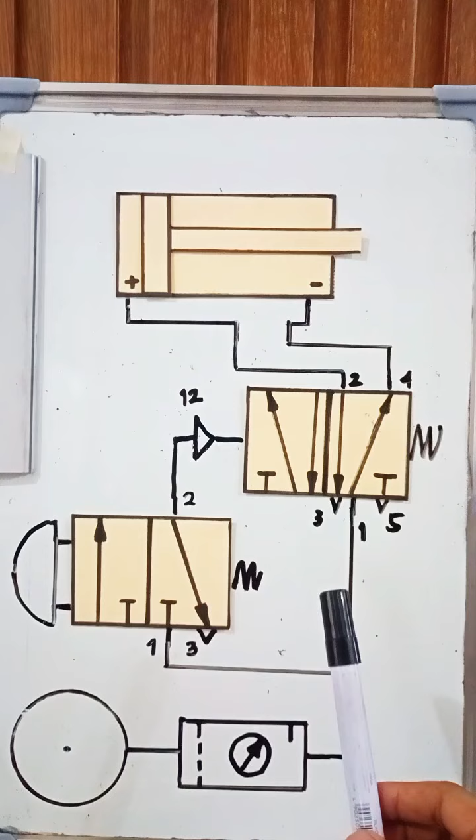Direct control of single acting cylinder and direct control of double acting cylinder is designed only for light loads. But if we're going to push or carry heavy loads, we cannot use direct control of single and double acting cylinder, because it will be hard for you to press the push button if they are carrying heavy loads.

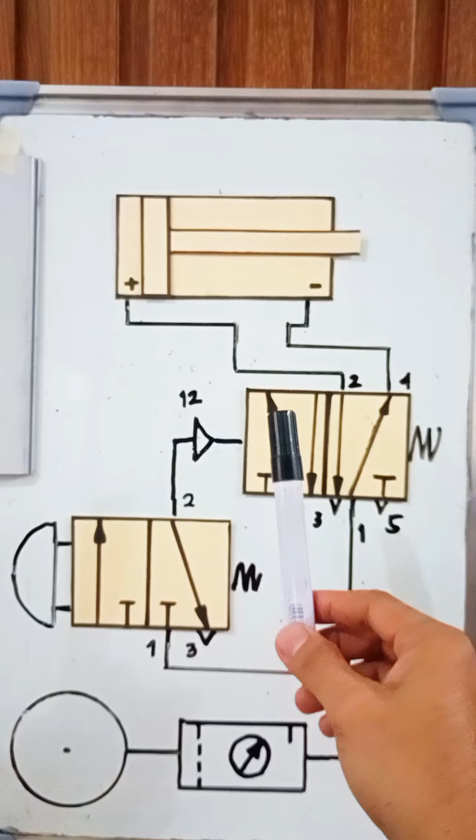Now we have the indirect control of double acting cylinder. This is designed for heavy loads. So we have here another valve.

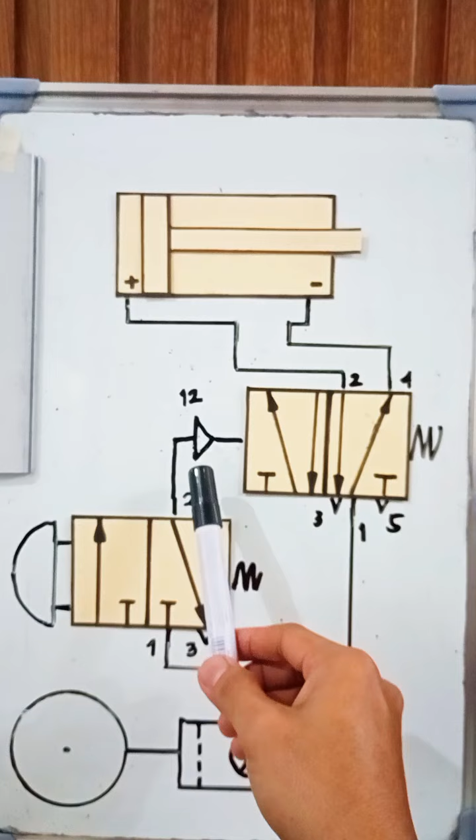This is a 5/2-way valve, spring return, but this time it is pneumatically actuated. It requires compressed air for this valve to switch over, before we have a push button. Now this is pneumatically actuated, it requires compressed air for this valve to switch over to this square.

And then we have here a push button 3/2-way valve. So this is our push button. This is a 3/2-way valve spring return. And then we have here the FRL unit and the compressor.

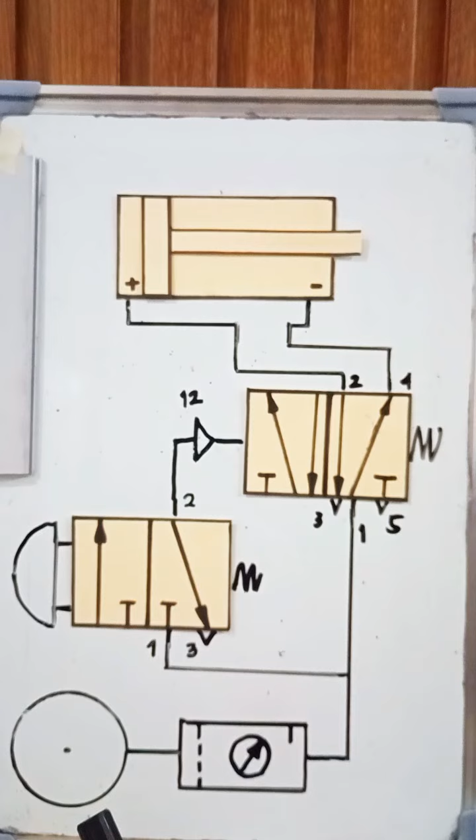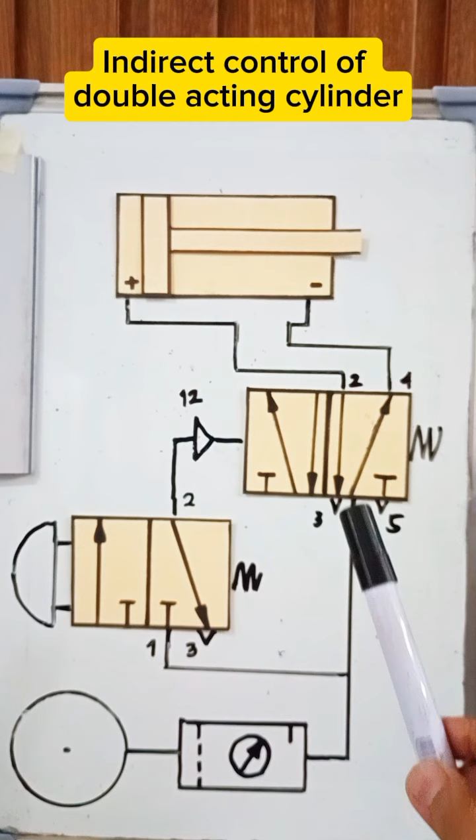From the compressor, the air will pass through the FRL unit and then supplied to port 1 of this 5/2-way valve and to port 1 of the 3/2-way valve push button actuated. Initially the air is cut off here, while in this 5/2-way valve the air is in the negative chamber of the double acting cylinder, meaning the piston rod is in backward position.

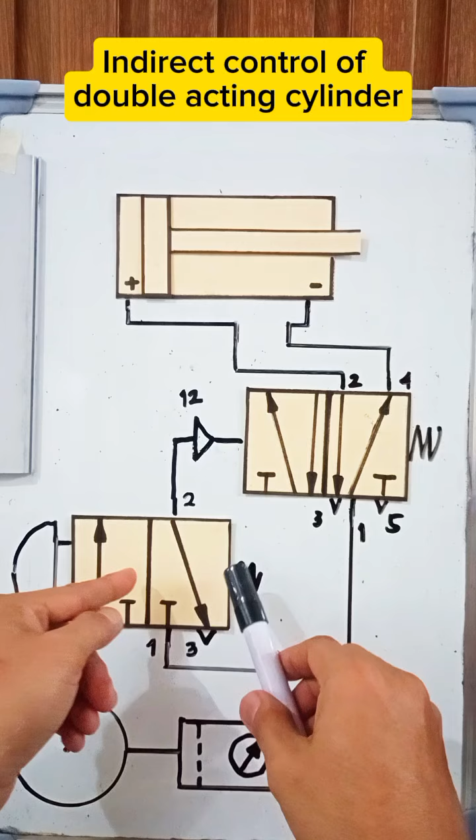Now if we're going to press this button and hold it, the spring will be compressed and this square will switch over here. Let's move this. It switches over here. So the air now from 1 is passing through 2 and then to port 12 of the 5/2-way valve.

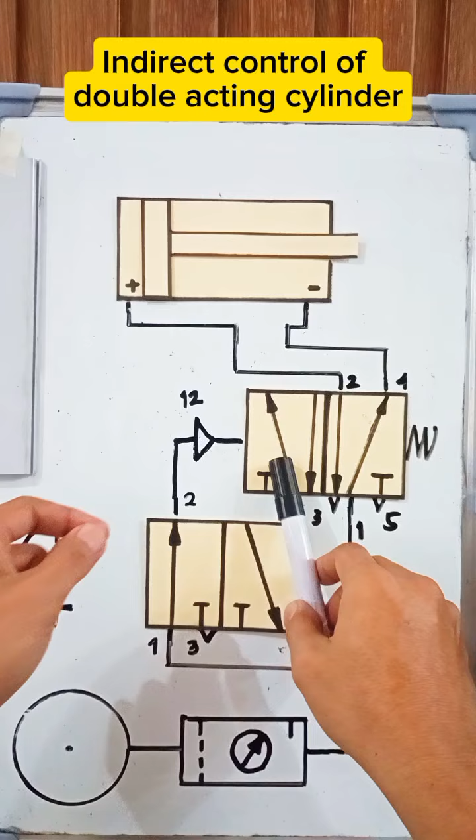The air is passing through here. The presence of compressed air here will push this 5/2-way valve, so this will switch over to the right. Now 1 is fed at 2, and then the air will pass through the positive chamber.

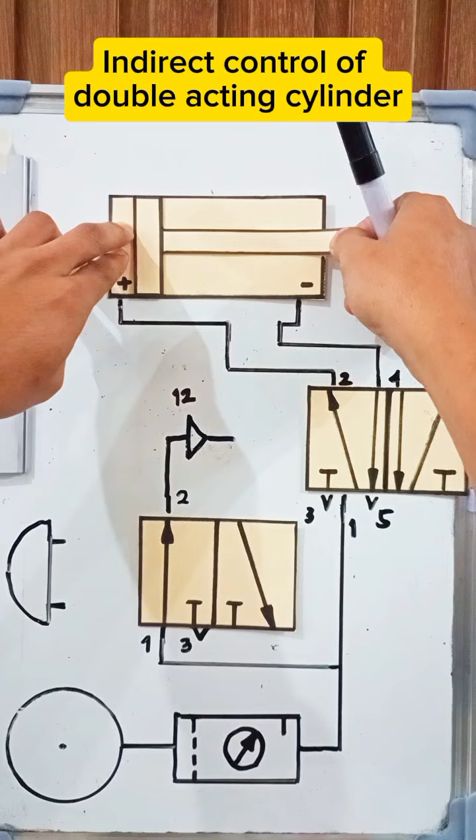The positive chamber of the double acting cylinder will be filled with compressed air, while the air in the negative chamber will simply exhaust at port 5, causing this piston rod to move forward. The piston rod is now in forward position.

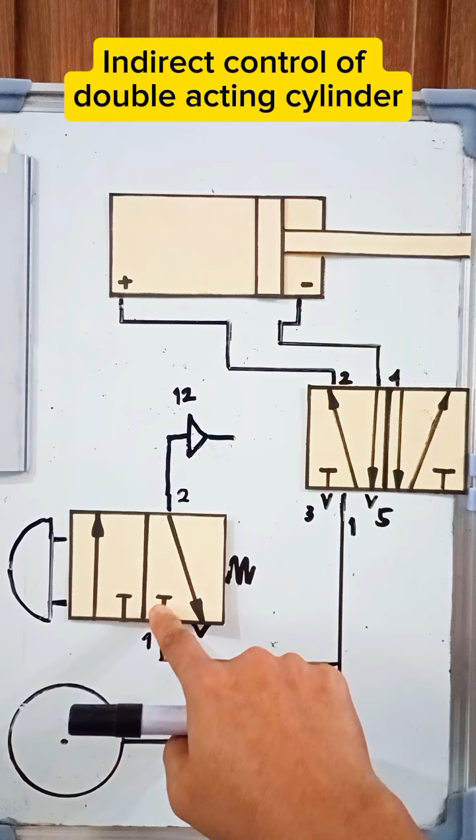And then if we're going to release the actuation of this push button, with the aid of the spring, this will return to its initial condition. The supply is cut off again, so there is no output at port 2. The absence of compressed air here, this 5/2-way valve will switch over to the left to its original position, because of the spring here.

So the air from 1 will pass through 4 and then to the negative chamber of the double acting cylinder, and the accumulated air in the positive chamber will simply exhaust at port 3, causing this piston rod to move backward. This will move backward into the original position.

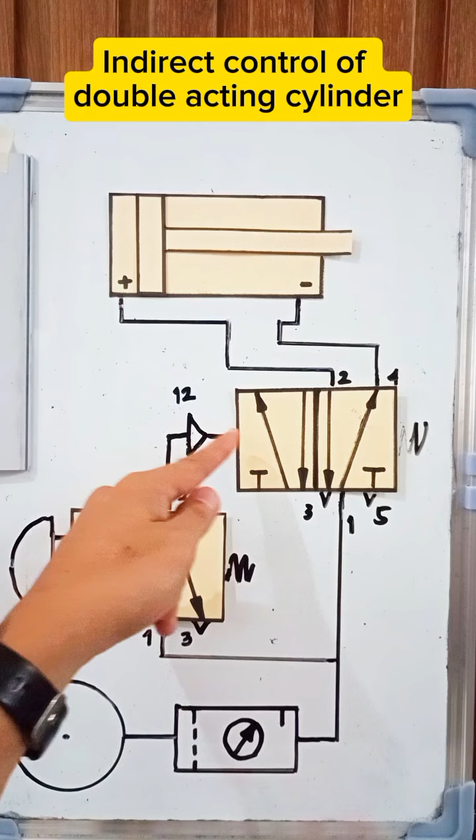Meaning it will be easy for you to actuate this push button, and the presence of air here will switch over this 5/2-way valve. It will not be difficult for you to push this button whether there are heavy loads at the piston rod of your double acting cylinder. So this is your indirect control of double acting cylinder for heavy loads.